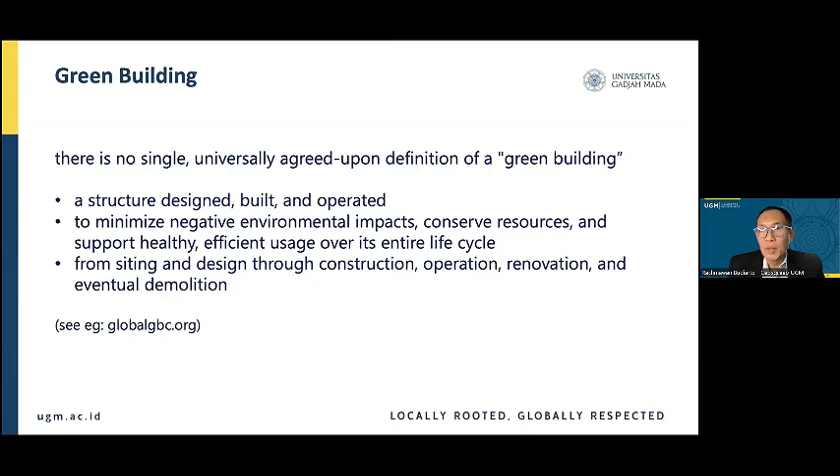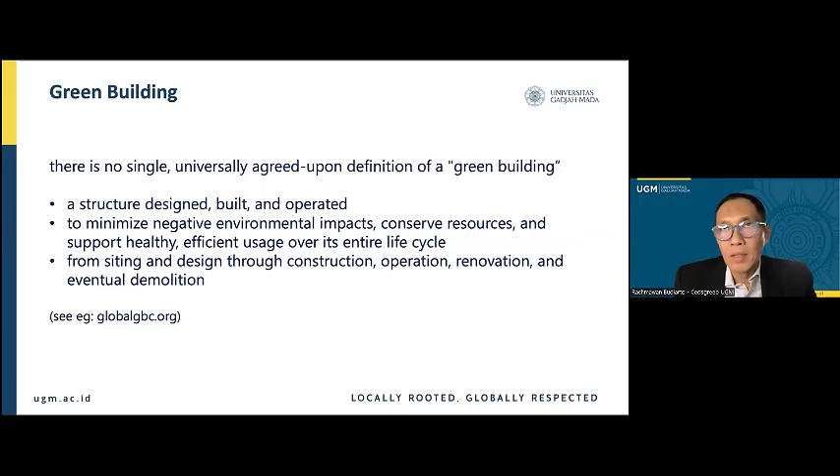Currently there is no single universally agreed upon definition of green building, but through these definitions we know that it is our tool for having better conditions of life in business and so on. Even green building has opportunities, for example, in veterinary, because if we apply the principles of green building, then we have the opportunity for having good conditions for our daily life, and for example, veterinary business, agricultural business, and so on. So that is green building. This is one starting point.

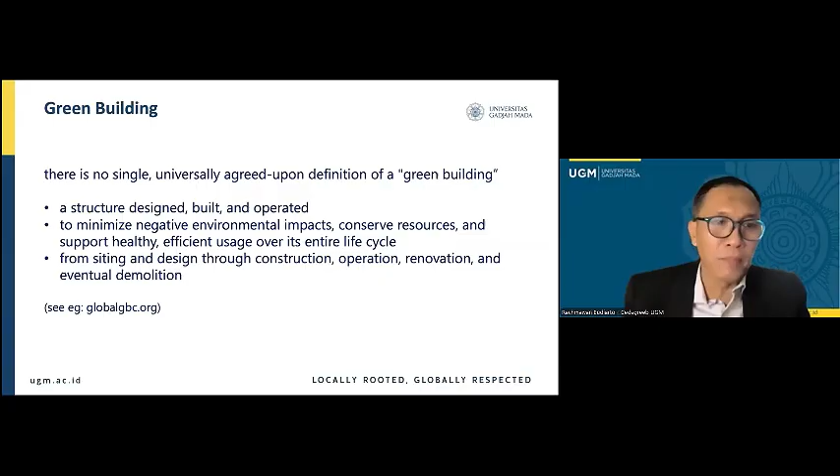We already know our common challenge, and also it is actually our opportunity to have a significant role, to spread goodness to our community. It is, for example, global warming challenges, with its very complex challenges.

It's related to very complex, wide scale, and very intensive impact, especially negative impact. One of them, it is not a new trend, but we can say it is a new trend in terms of our new knowledge, that one of the very serious challenges related to climate change is the event of the heat wave.

For example, we can find so many nowadays references, papers, information, and so on. Or maybe we experienced that. So the heat waves become more serious. For example, one paper provides very bad conditions, where only in 2023 there were more than 178,000 global deaths due to or related to the heat waves.

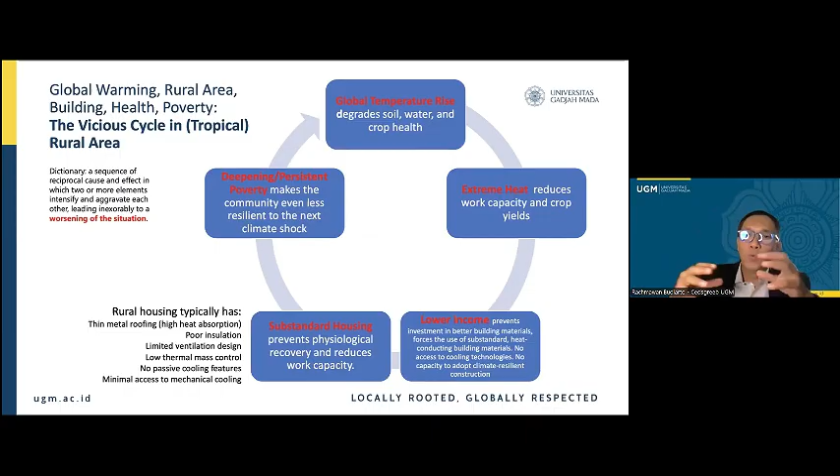And if we talk about income decrease, then we start to talk about the condition that better building material will no longer be affordable, too expensive. Our brothers and sisters in the villages are forced to use substandard building, substandard housing.

Substandard housing prevents physiological recovery after work and reduces work capacity, and then it deepens the persistent poverty. And then we can see a vicious cycle, for example, in this slide, in tropical rural areas.

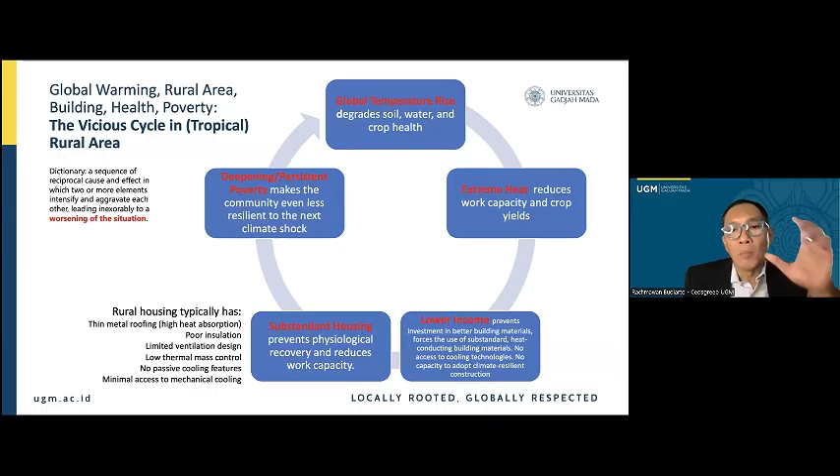If we start to focus our discussion on rural housing, we know that the rural housing in our home area typically has thin metal roofing with high heat absorption characteristics, poor insulation, limited ventilation design, low thermal mass control, no or very poor passive cooling features, and due to very limited financial capability, this housing has minimal access to mechanical cooling, even a very simple mechanical fan.

So it is our challenge. So again, the green building—I have already started with this effort in knowing the definition, but I will stress this area. By having the green building, by developing the green building, we have the opportunity to minimize the negative environmental impacts, to conserve resources, and also support healthy and efficient usage of all kinds of resources over its entire life cycle.

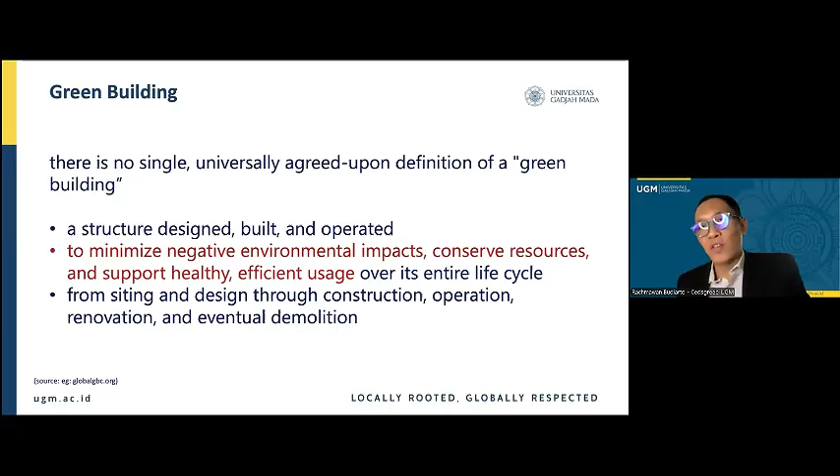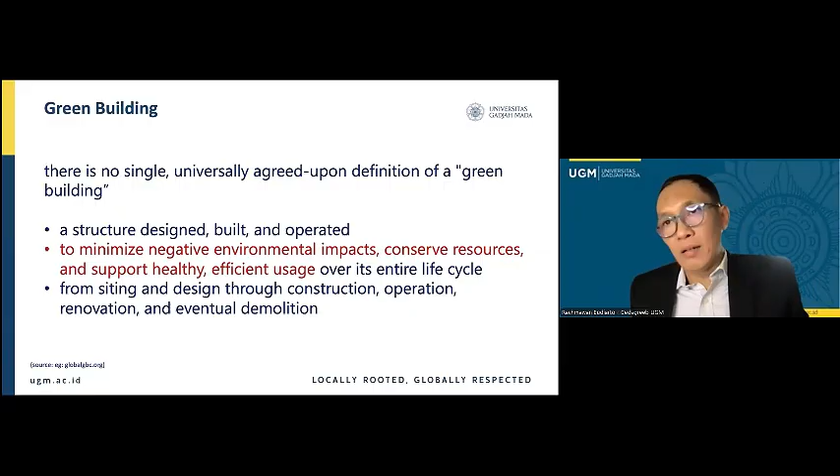So talking about the green building, it is not only about our effort in reducing carbon footprint, for example. It is not only talking about energy efficiency, but also we can have the opportunity to manage our common complex problems. Actually, not only in rural areas, but also in urban areas, the condition can be worse.

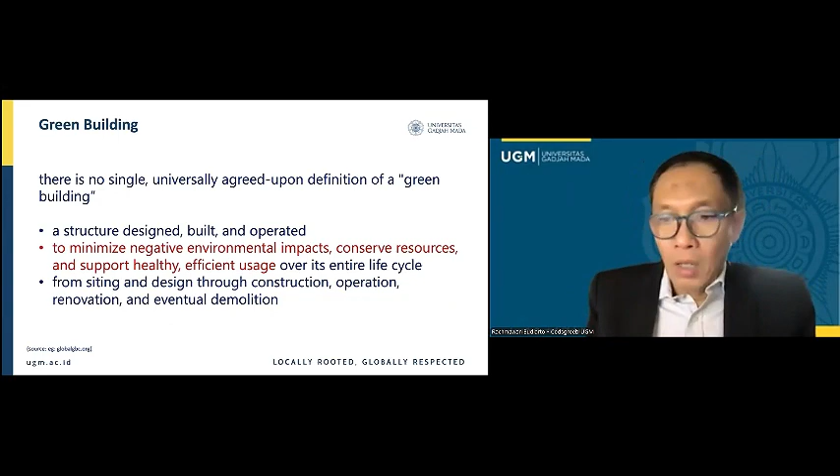But we can talk about that later on other occasions.

I want to discuss the health issues related to green buildings, not only energy efficiency. Green buildings play a role in thermal and environmental health protection, because this type of building, with special design, has the opportunity to optimize indoor environmental quality. When we talk about high quality indoor environment, we can discuss productivity, reduced indoor heat stress and humidity, lower risk of dehydration, improved thermal comfort, indoor air quality, and respiratory health.

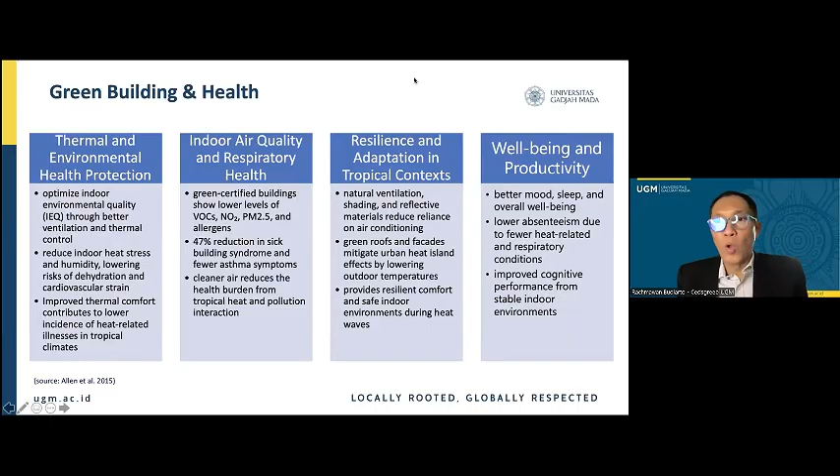Especially for the tropical context, this is very important for resilience and adaptation. Natural ventilation, shading, and reflective materials can reduce our reliance on air conditioning. This is very good, for example, in urban areas where we know there is a phenomenon called urban heat island. Green roofs can mitigate urban heat island effects by lowering outdoor temperatures, giving us the opportunity to reduce air conditioning use significantly, provide resilient comfort, safe indoor spaces, well-being, and productivity.

What about rural areas, or poverty? If we discuss our common challenge of poverty reduction or mitigation in rural or urban areas, green buildings are one of the important tools in breaking the poverty cycle. This type of building has the capability to manage so many problems related to poverty, because the root causes of economic stagnation are, for example, health, energy cost, and productivity, addressed simultaneously and interestingly in one building design.

But of course, when we discuss green buildings, the domain of discussion is so large. We can categorize green buildings in many ways, but let's categorize them into 5 types. The first one is the vernacular or bioclimatic group.

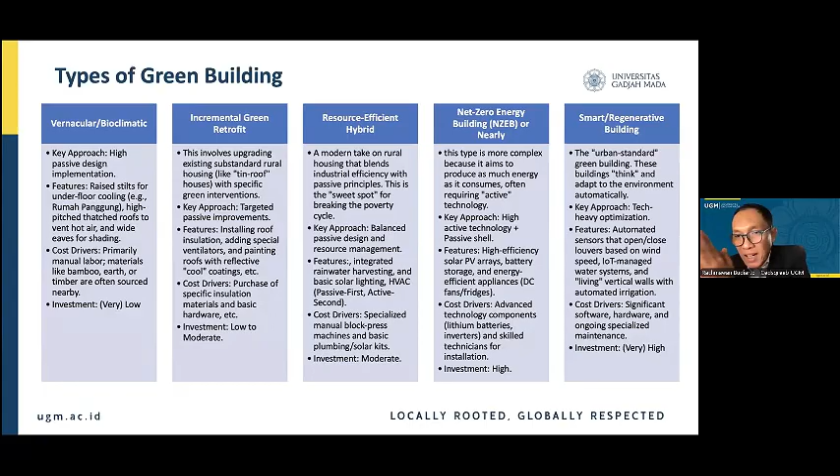Then there's the net zero energy building and also smart regenerative buildings. These last two types of green buildings are more complex, involving many technical improvements with many tools. In smart regenerative buildings, we use IoT in a very intensive way, managing water systems, lighting, and so on. Investment, of course, could be very high.

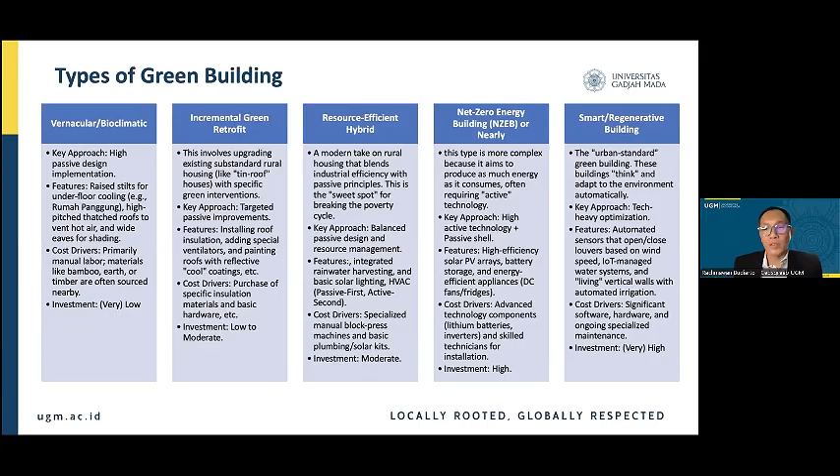So again, if we talk about a previous slide, for example the definitions, although we do not have yet a single definition of green building, we know that the strategic role is, for example, because we can build, retrofit, or modernize the building. So the strategic role is not only health, not only productivity, but also stimulating local supply chains of green building materials for these 5 types of green buildings. If we talk about the rapid urbanization, that is the background, then we can manage them.

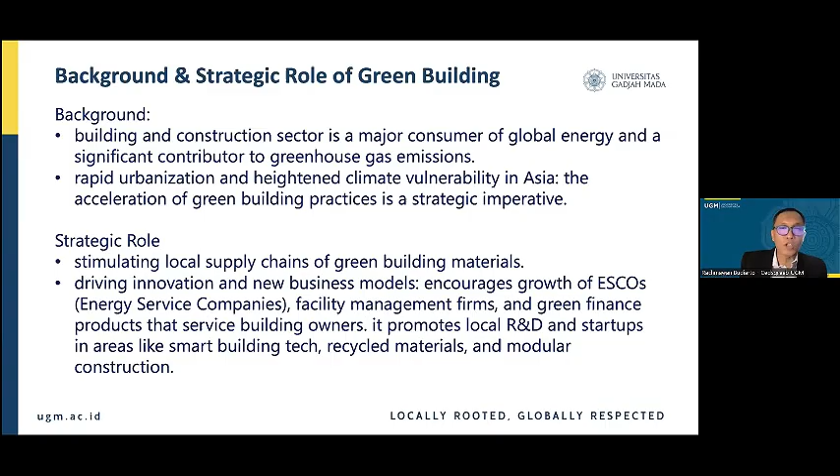If we talk about the business model, it can encourage the development of, for example, energy service companies and other businesses. It promotes local R&D, startups, and so on, not only for urban areas but also for rural areas.

Let's talk about further discussion. Just as a starting point, we can discuss, for example, the country comparison of Indonesia and Bangladesh. Thank you for hosting this webinar. The challenges, for example, are the same. Of course, between these two countries, Bangladesh and Indonesia, there is a difference in opportunity and challenge, but look at that.

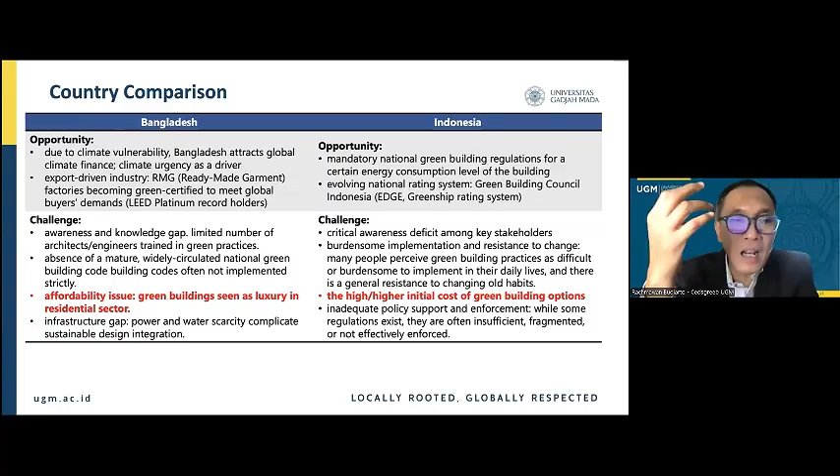Bangladesh and Indonesia share a similar challenge. For example, green building is still seen as a luxury, especially in the residential sector. Also, the challenge in Indonesia, at least from the perspective or the factual situation, is still high — for example, the higher initial cost of green buildings.

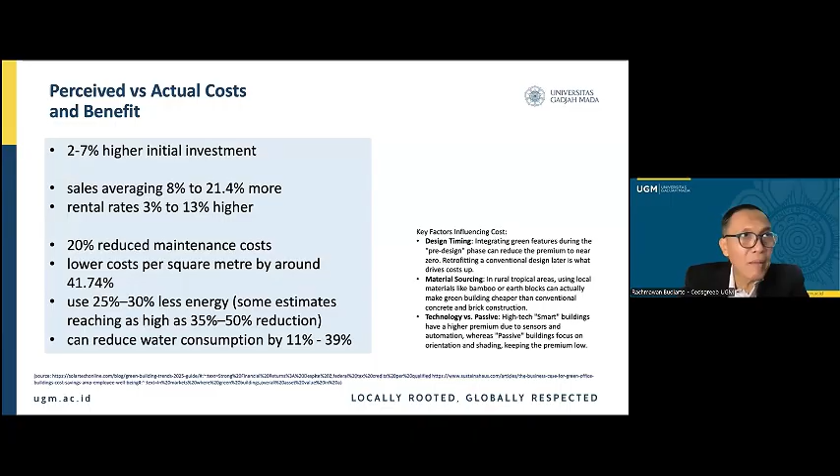And also, when we have the opportunity, we try to mainstream passive design. Yes, it is an interesting challenge because it is also about the mindset. Because, for example, having passive design in one house, maybe there could be a perception that that house or building is not modern, that it is so old, for example.

Some people talk about modernization. Some people talk about better level in social status if the building or house has many air conditioners. It is factual. In the community, we can hear that, we can see that.

So talking about the limitations of the budget from the government, one of the strategies is to increase the role of private sectors. Then we start to discuss the financing. One of our strategic options is to encourage the private sectors, increase the role of the private sector, because this private sector has, if we categorize it, five strategic roles.

Creating market demand and willingness to pay: developers, retailers, industrial leaders can cultivate consumer demand, for example for certified green spaces, especially in the urban area.

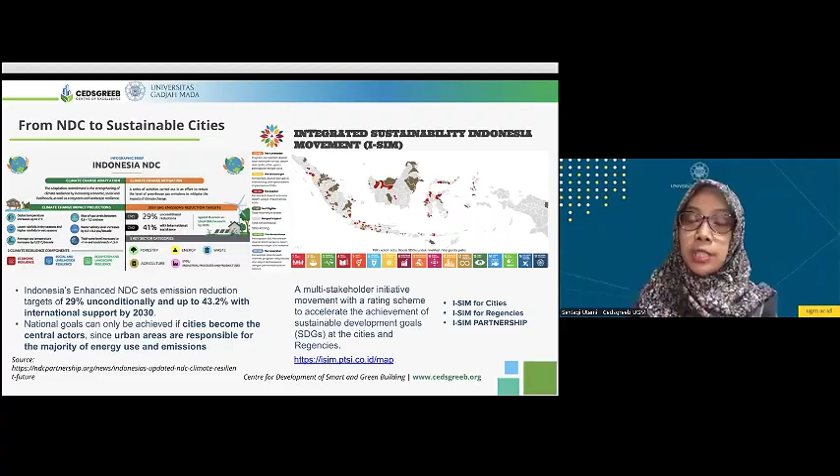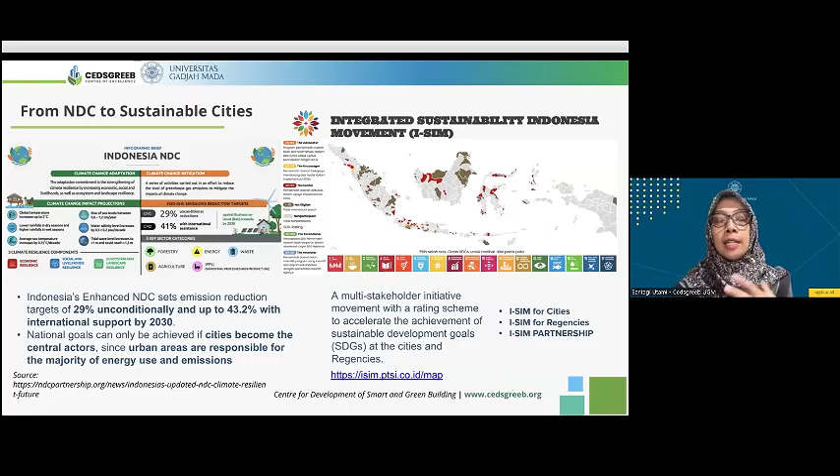However, we have a good initiative in Indonesia - an integrated sustainability Indonesia movement, I-SIM. It has many stakeholders and has involved more than 200 cities and 200 regencies in Indonesia, along with partnerships as well. They are trying to monitor the sustainability condition of their cities, moving towards the design of a future city innovation concept, which is a smart city concept.

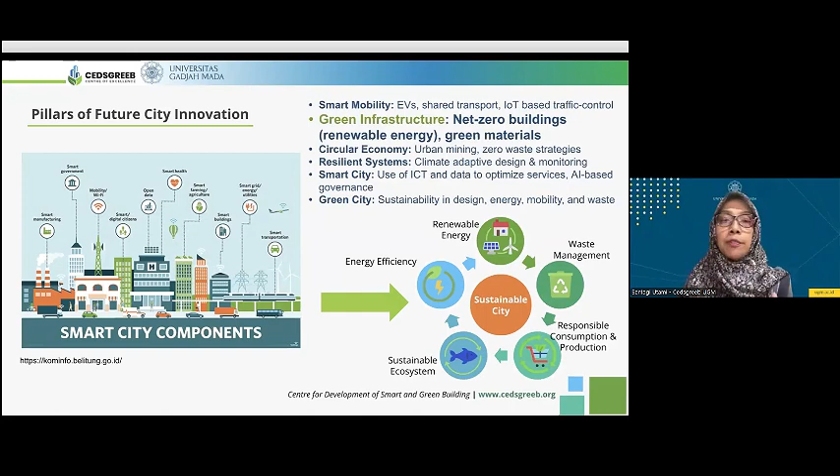Now, the smart city components here actually have all of the entities needed for a sustainability development condition. If we talk about smart city components, energy efficiency is one of them, and then there's renewable energy - both of these deal with SDG 7. Then we talk about waste management and responsible consumption, which is SDG 12. We talk about sustainable ecosystems, which can be SDG 13 and also SDG 15, life on land.

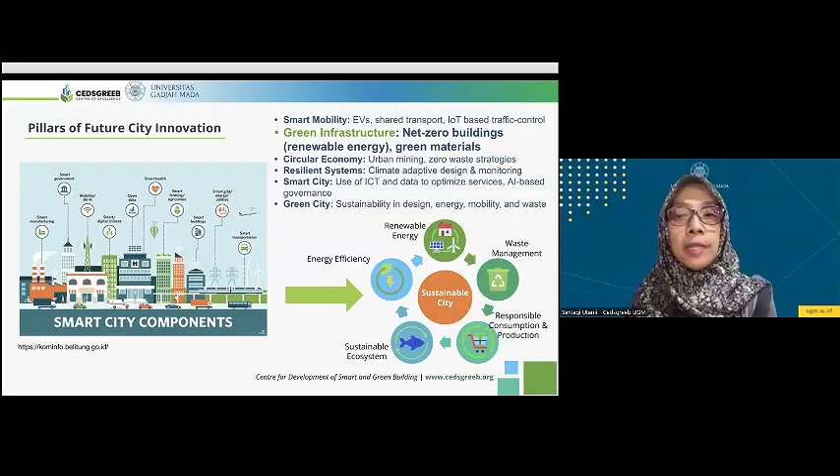But what we are focusing on in Cedsgreeb is actually the green infrastructure component of the city - how to have more and more net zero buildings with renewable energy, with green materials, with green building concepts being implemented in these areas.

We are, of course, very welcome if any of you want to join our team and provide new methodology. But I think the most challenging work was visiting more than 10 cities and more than 10 rural areas in Indonesia.

So some of them are already big cities, some are still emerging, changing or moving from rural areas, becoming cities. We visited them and found evidence on a true scale of building related emissions. We try to measure the energy consumption, the index energy consumption for typical buildings, not only commercial but also residential buildings.

Our work is more like a triple helix approach. We have university collaboration, we have the industrial or private sector—Rachmawan mentioned a lot about that—and the government is also involved from the very beginning. The engagement with the government includes dialogues mapping out the standards and regulations we have now, but also planning for future framework implementation for a broader and wider impact in Indonesia.

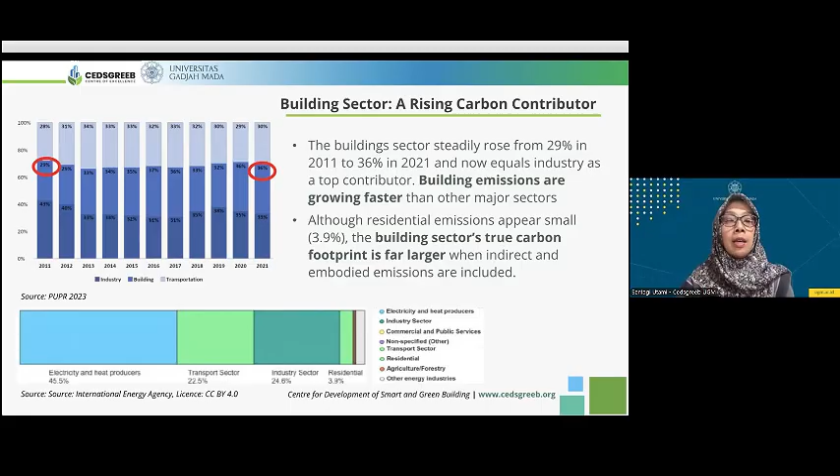If we look closely at all the types of buildings, we can see residential is contributing 3.9% toward the rate of building emissions in Indonesia. Now, residential building, 3.9%—where is it from? Is it only from fossil fuel combustion? Turns out this is only tracking so far. What we can do is the energy use.

We have not yet been able to capture the embodied carbon that starts from the design of the building, then construction, including transport of building materials, using prefabrication materials, green materials—those key factors that have also been highlighted in Rachmawan's presentation. It's therefore very important for us to look at the whole life cycle of a building.

We already have some green building standards in Indonesia that look at a complete life cycle, including until the demolition of the building. But so far, we have not yet been able to really monitor or calculate the energy emission, the carbon emission from this building, including the energy usage.

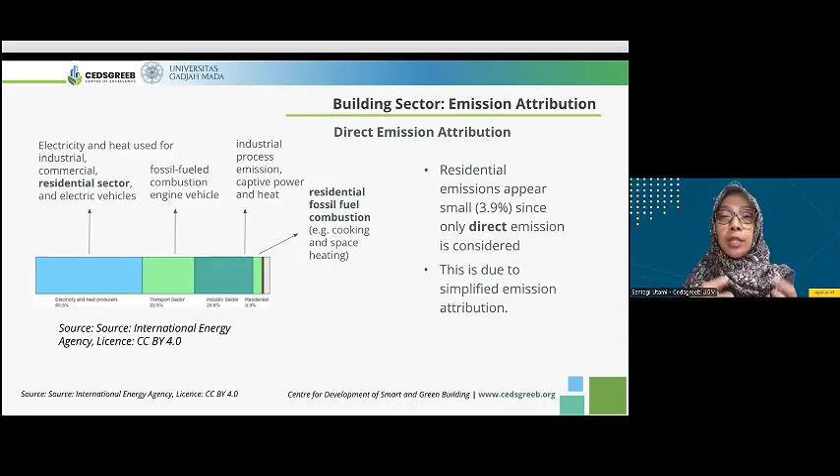Now, a little bit more about residential fossil fuel combustion. Residential and non-residential building sectors drive demand for electricity and heat, especially from operational emissions, and then transport of new building materials, as I mentioned, and industrial processes to produce new building material.

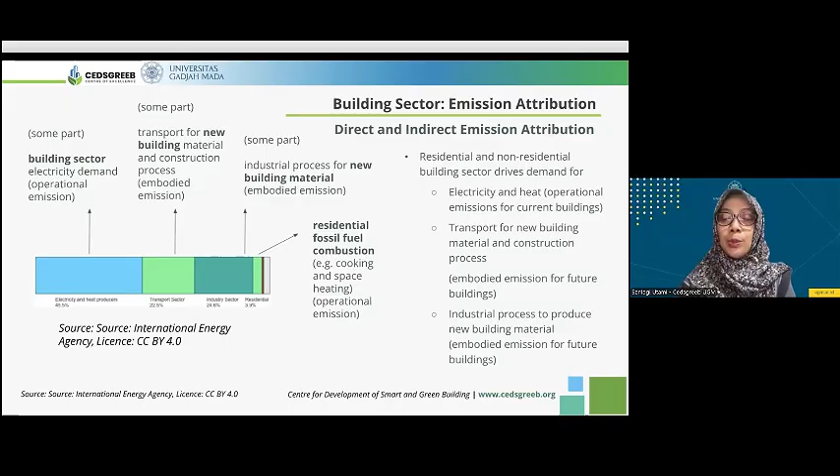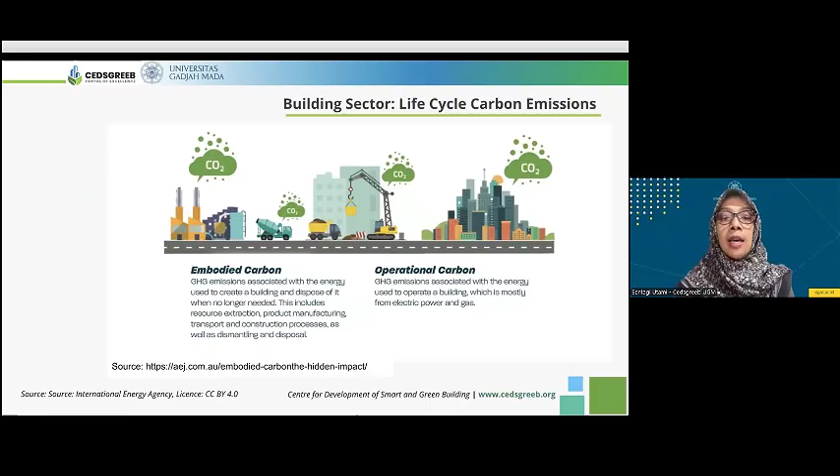Again, it's important to look at the entire life cycle carbon of a building—the embodied carbon, the operational carbon. How do we do this? We try to map it out in our building, looking at the life cycle carbon emission: the upfront side, the recurrent side, and the end of life side.

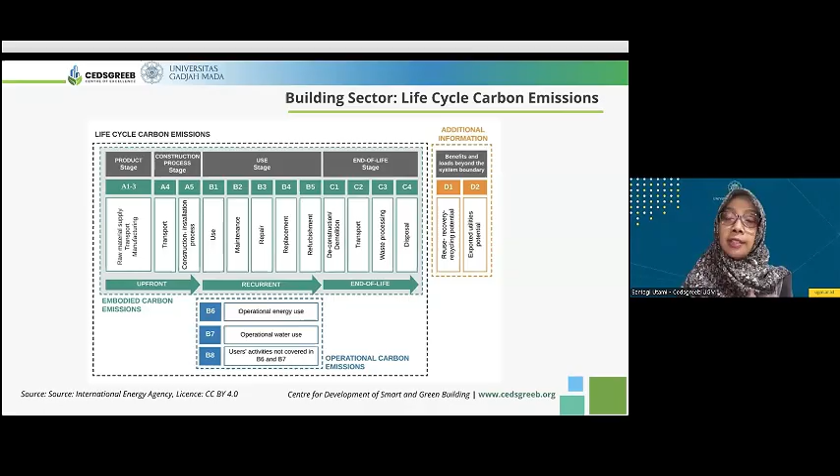So far, we've seen that for green building aspects or implementation, what we can really improve for emission reduction or even energy reduction is on the operational side.

Now, having said that, let's look a little more at the direct and indirect emission attribution of these buildings in Indonesia. This attribution has already been mapped out in the book, Roadmap Towards Implementation of Green Building in Indonesia, from 2023. This is the book we collaborated on with the Ministry of Public Works and Public Housing—at that time under the same ministry—and also the Ministry of Energy and Mineral Resources.

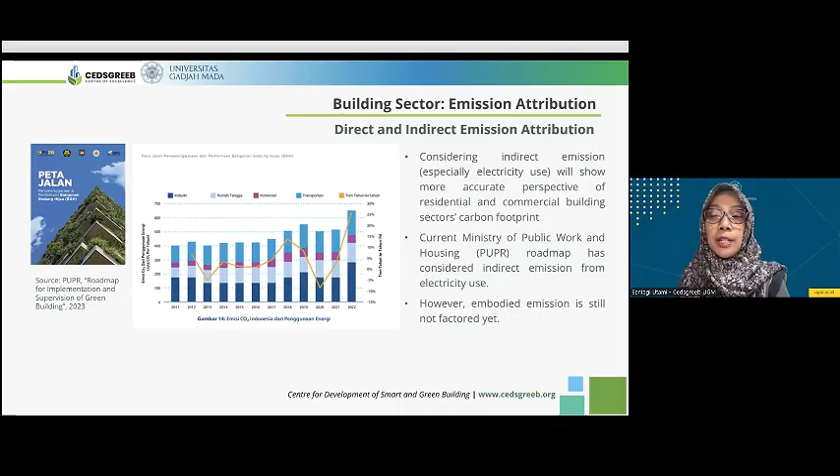So here we consider that indirect emission, especially electricity use, will show a more accurate perspective of the residential and commercial building sector's carbon footprint. This is our expectation. However, embodied emission is still not factored in yet.

This is where we have to look more at the strategic role of the private sector, as mentioned in the previous presentation. Most emissions in the building sector can be attributed to indirect emissions from electricity use. We have all the numbers - you can look at it from gas, fossil fuel, LPG, biogas, and electricity.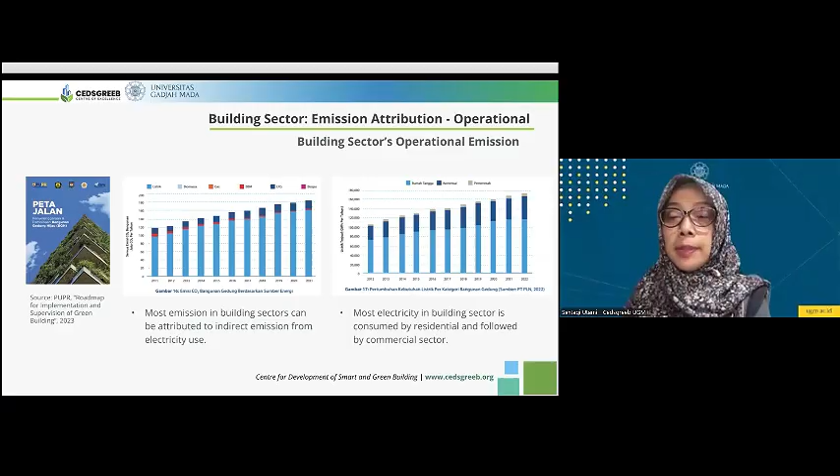We can also look at building types or the building sector - commercial buildings, government or public buildings, and residential buildings. This is already all mapped out.

Now, having said that, one of the most important strategies is including forestry and other land uses, the FOLU strategy. This is more of a carbon offset strategy. FOLU is something we are looking at in Indonesia now.

While FOLU represents the backbone of Indonesian mitigation efforts, the rapid growth of energy emissions makes the energy sector the most critical challenge to achieving long-term low carbon development.

Looking at the energy initiatives or strategies so far, we are trying to reduce 314 carbon emissions. From that amount, 13% can be achieved by implementing green building strategies, which mainly involve energy efficient buildings.

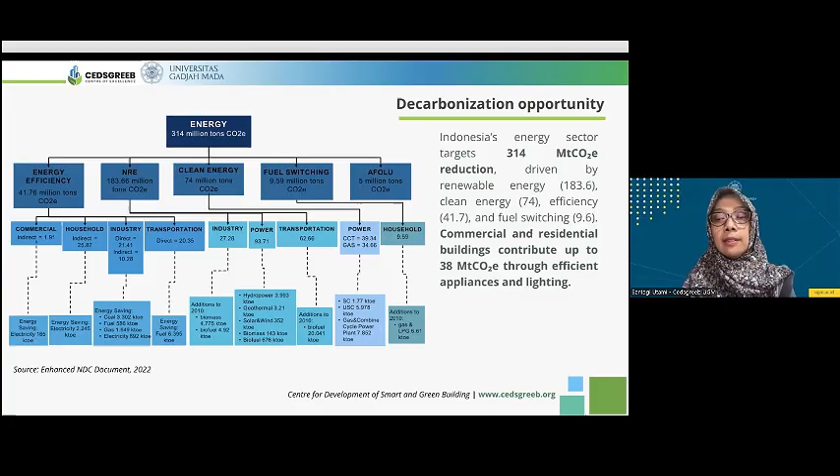If we look at how to achieve a more energy efficient building, it's by having more efficient appliances and lighting systems. So now we are talking about the more technical part of having more energy efficient or green building implementation.

If we look at the building types and emission levels, we have proposed so far: baseline building, low emission building, net zero operational carbon building, and negative emission building. These concepts have been provided in our new book.

What becomes part of the green building strategies, as mentioned in the previous presentation, is active design, passive design, behavior change, and new renewable energy integration.

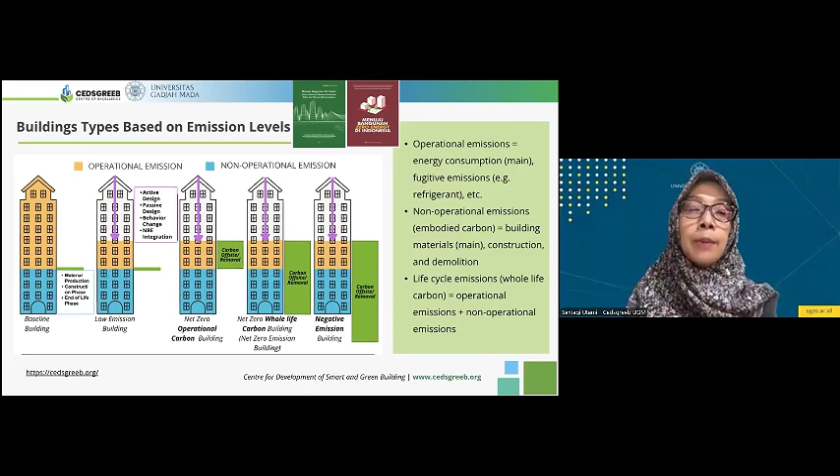Rachmawan also mentioned that passive design is like the backbone of achieving a low emission building. But the key point or key factor is that passive design has to be supported by green materials, by the private sector, by industry that can actually track this green material or track the embodied carbon emission.

Now, regarding Indonesian regulation, we already have lots and lots of regulation related to low carbon development. Ultimately, the framework demonstrates that green building regulation is not merely about compliance, but it's all about the strategic acceleration of decarbonization and sustainable urban development.

Unfortunately, most of the energy carbon emission is still happening in urban areas. But if we look closely at the green building regulation in Indonesia, it actually already provides many technical or practical strategies to succeed in making green building implementation succeed.

The technical specification of HVAC systems in Indonesia is pretty similar to Bangladesh, India, and other countries. We highly rely on ventilation and air conditioning, and also lighting and insulation.

There are lots of technical specifications that architects or building designers can use as guidelines towards better and greener passive design, using sustainable materials and ensuring the performance baseline.

Now, certification is also becoming a trend in Indonesia, not only because we start to really understand the importance of avoiding climate change, the importance of not only being aware but doing the movement to help the earth avoid further damage due to climate change.

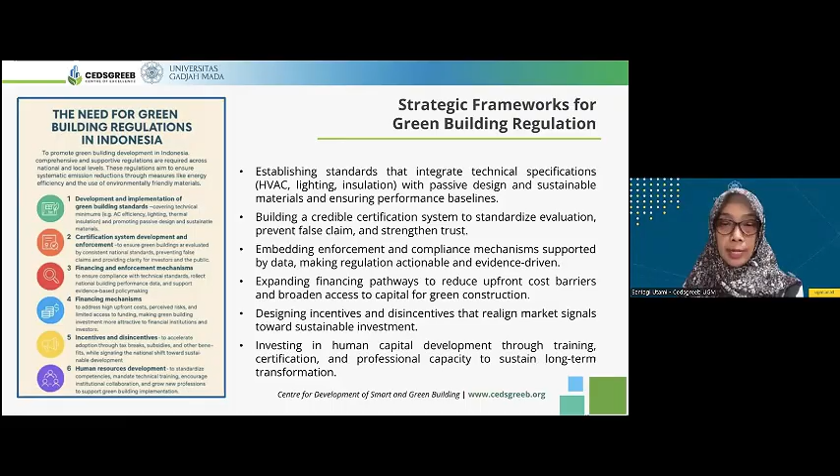Now, if we look more deeply into the policy, we have mapped out six entities very important in succeeding with green building implementation: regulatory measures, building assessment techniques and technologies, financial instruments, economic instruments, capacity building, and overall performance.

Indonesia's building decarbonization is supported by all of these comprehensive measures, and this is what we are looking at and want to support across all of these entities.

For technological interventions, for example, we have highlighted interventions in heating, ventilation, air conditioning, and lighting systems. You can read our presentation later to go into more detail on how much energy consumption can be reduced.

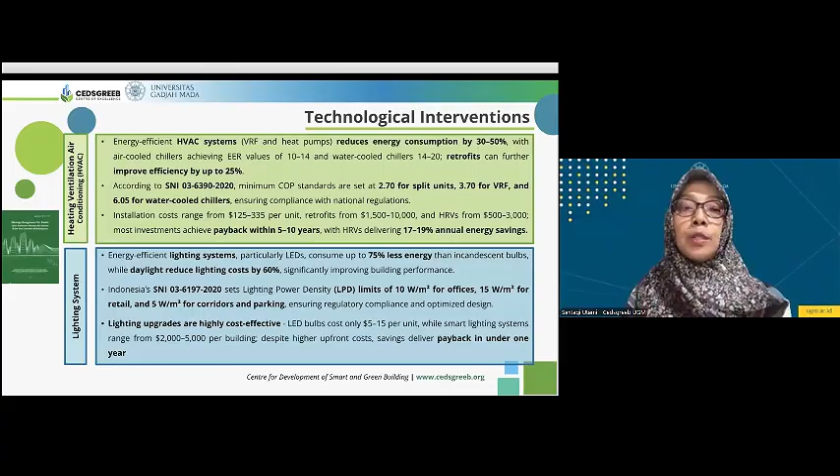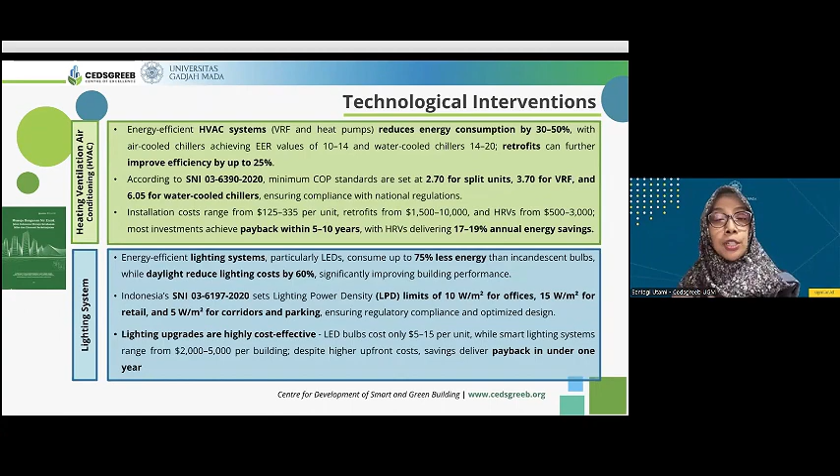For example, using VRF and heat pumps can reduce energy use by 30 to 50%. Using LED for the lighting system can reduce 75% of energy usage. Using daylighting can reduce energy by 60%, and so on and so forth.

So these are some technological interventions that we have mapped out in mechanical ventilation as well. But most important is that we still have to fulfill one of the requirements in green building criteria, which is indoor health comfort. So we still look at the fresh air rates that are needed, and the temperature baseline that is required, and so on.

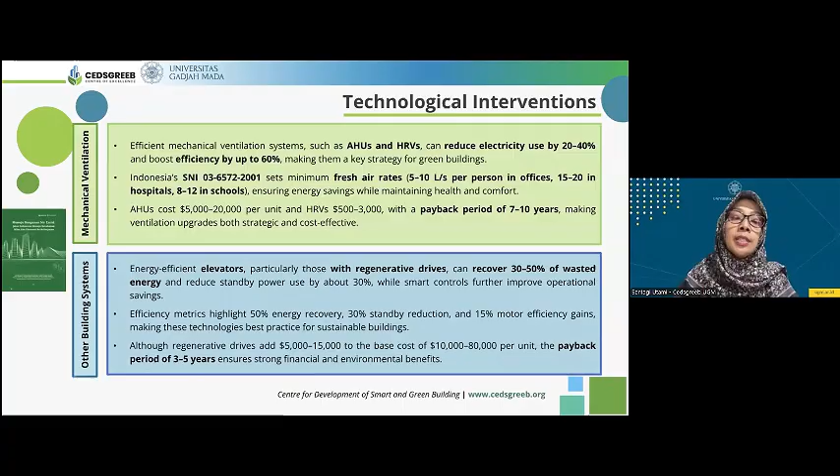Not only trying to reduce energy consumption or carbon emission. As a summary from all the findings we have so far in our 2-3 years of work, we have found some key findings. First of all, new building requirements need to be fostered toward zero carbon construction or zero carbon planning. And later on, if the building already exists, it needs to be a zero carbon building operationally, until a zero carbon building demolish.

There are also key findings related with establishing maybe not a new building standard, but more technical guidelines, standards or requirements or regulations related with the private sector, and also findings from research that can be implemented in the green building standards or regulation itself.

We want to support the transformation in the energy market. This is our agenda in 2026. We want to strengthen the workforce and also the supply chain for the entire life cycle of the building. And also we want to expand access to capital. This is why we had the previous talk about financial support.

Now overall, if we look at those 4 or 6 entities - the regulatory measures, the economic measures, the standard measures, the advice and leadership measures - this is what we will be doing in the Indonesia case study. We will try to implement most of our Indonesian regulation, including the building energy codes. And for the market issue, we will have more role from the private sector.

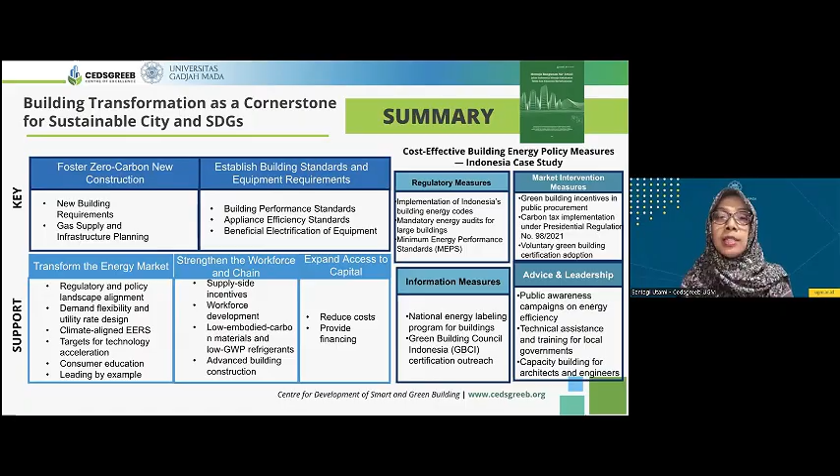For the information measures, we will map out and reach our green building council, our green building initiators, and other centers of excellence that are working in green building and smart building. Together we could provide, for example, a policy brief, work on advocacy toward the government, and have leadership toward public awareness campaigns about energy efficiency and carbon emission reduction in Indonesia.

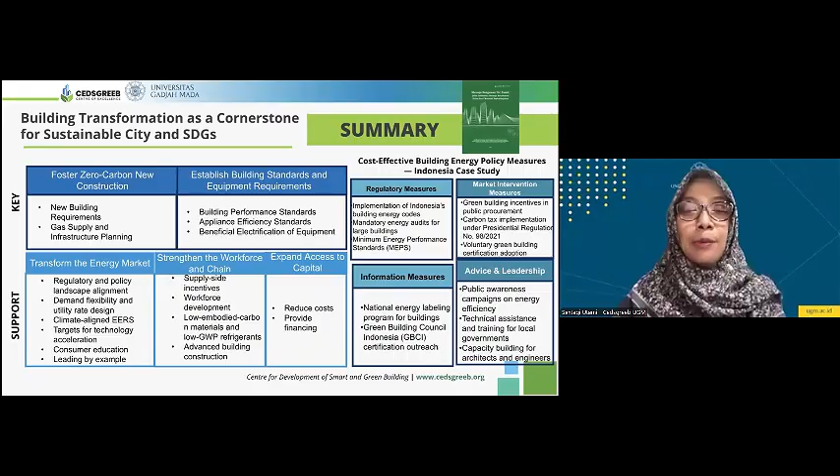All of these strategies and ideas have been put inside this book. Hopefully it can be published soon, and we invite all of you to enjoy the book later, and hopefully we can continue with further discussion regarding this matter. I think that's all I can have for this talk. I will give back the time to Mrs. Hureng Janan.

Thank you so much, ma'am, Dr. Sentagi, and also Dr. Rachmawan. These two presentations are very unique - though we know about green building or green economy or blue economy, we just had general knowledge, but these are very comprehensive, and though it's based on sustainable cities, it is easily replicable toward sustainable rural areas also.

So now we actually have some questions in the chat box. We are opening the Q&A session or discussion session. One of the questions has already been answered by Dr. Rachmawan, but for the sake of other participants, I'm reading the question from Mr. Shahzad. He is asking what financial mechanisms can support small rural housing clusters that are not attractive to large investors, and could digital platforms or pooled financing help aggregate rural housing projects for investment. Although Dr. Rachmawan you have answered him, I'm requesting you answer this question again for the sake of other participants. Sir, the question is toward you, Rachmawan.